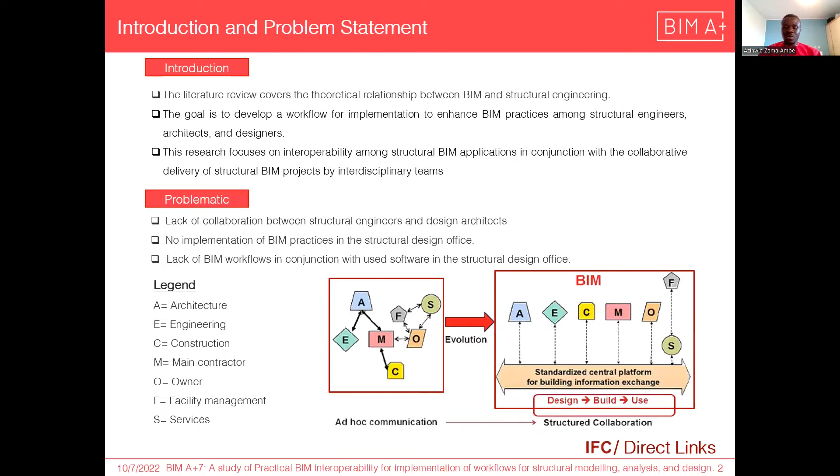This diagram represents the current state of the construction IT industry, how communication used to be made between the different interdisciplinary teams some years ago. We see an ad hoc communication that doesn't flow between each team. With evolution, we have come to realize that with the help of BIM, we have a standardized central platform for building information exchange, which ameliorates communication and cooperation between design teams. So how is this done? This can be done through the help of IFC and also direct links that will be seen subsequently.

The methodology of collaboration that we'll be implementing here will be discussed from this workflow. We can observe the architectural collaboration workflow from a BIM authoring tool, sharing information between an architectural model and a structural analysis tool. At the beginning, we see the workflow of an architect when a project is initiated, how the architect initiates the project within its own team, and how information is exchanged with other teams. We see the workflow of the structural engineering team, how collaborative they are within themselves, and how information is exchanged between them.

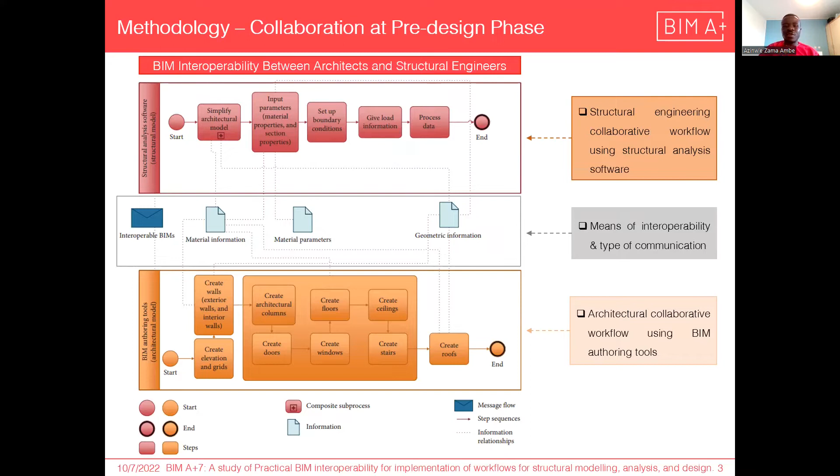There's also a method of communication that permits them to exchange information between themselves. Information has been exchanged through message flows. We have sequences, information relationships. We have material information exchanged at each step based on the type of project and the goals to achieve on milestones. We have material parameters. We have geometrical information as well, exchanged at the early stage of the design.

Our main focus of this work is characterized in this little diagram. What I'm trying to establish here is to migrate from a BIM authoring software used by an architect, say Autodesk Revit, into a finite element analysis software, where we transfer a model with load combinations and load cases into a finite element platform without remodeling, and which can automatically be updated without remodeling.

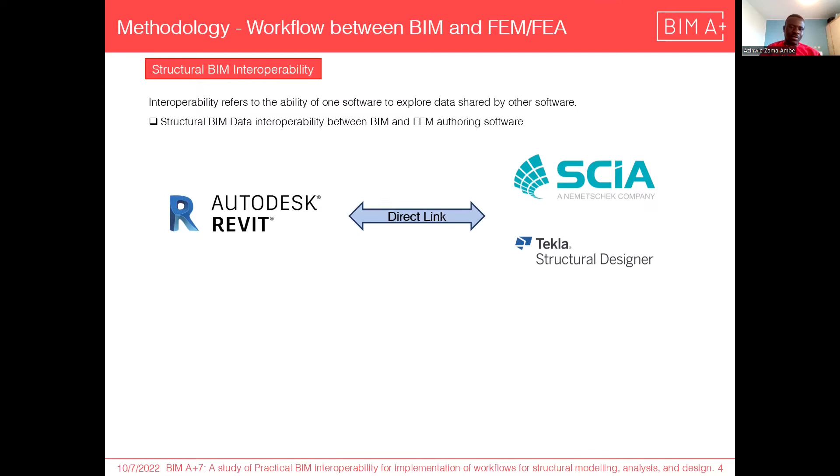So we can see a definition of interoperability. What is interoperability? From the structural analysis point of view, it is the ability to exploit information or data from one platform to another. If we receive information or a model from an architect, like this 3D model, how can we work in collaboration with the architectural team on a complex structure while keeping track of all the updates made on the structure or in the design phases?

We have different types of communication, as I mentioned earlier, and we will be elaborating a lot more on the direct links, because IFC has been covered. We have seen presentations with IFC as the type of data exchange. Since we are dealing with finite element method data transfer, we are going to focus more on the direct links that collaborate with this BIM authoring Autodesk software.

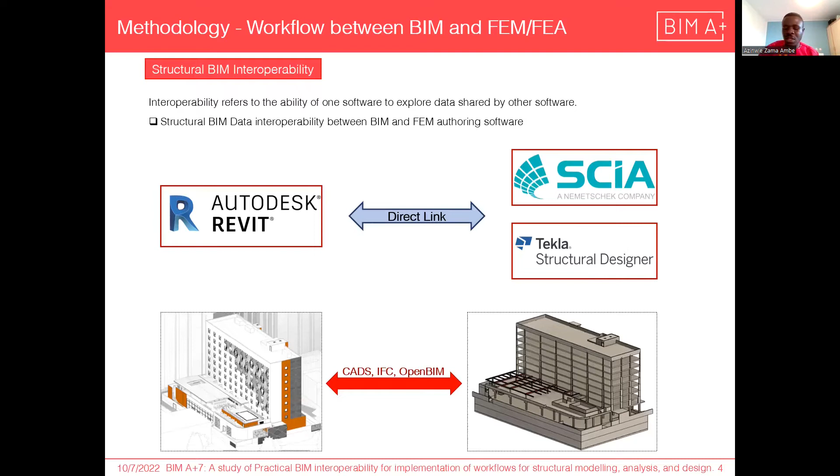So I will go directly into the workflow and the communication, how the workflow between Autodesk Revit and SCIA Engineer works. Why do we choose these? We choose those two basic structural finite element software packages because they are available in the Slovenian and Scandinavian market, and most design offices use them. SCIA Engineer is an excellent software when it comes to engineering report organization, or generating quality engineering reports.

And we will be using Tekla Structural Designer, which is an advanced BIM structural design software as well that is implemented when it comes to steel structures.

And so when we have to implement the workflow between Revit and SCIA Engineer, we begin by creating a structural model in Revit, meaning we can collaborate, we can work together with the architectural model, we can define our grids, basic grids and basic structural elements like the columns, and we take it from there.

We start by creating the structural model in Revit, we create the analytical model in Revit, and we export it to SCIA Engineer using the SCIA Engineer direct link, the CADS link rather. We do the analysis in SCIA Engineer, we do the designing in SCIA Engineer, and we export back to Revit for possible update in case the sizing of the structural elements have changed.

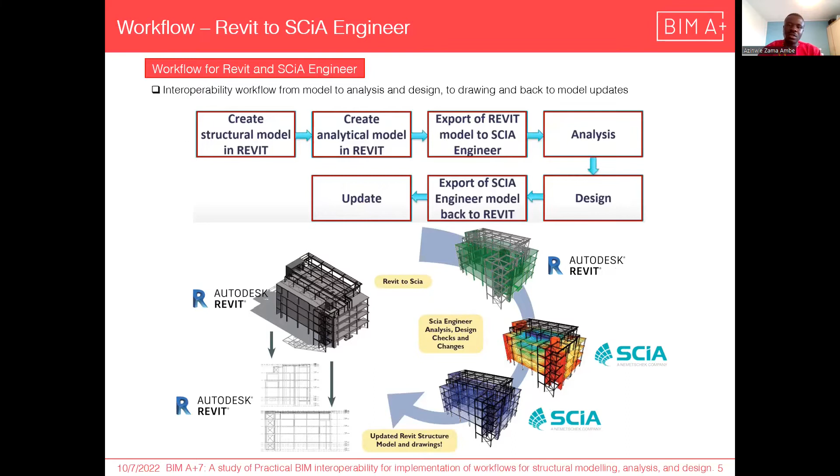And this is actually an application of the workflow between Revit and SCIA Engineer. We have this hall that was modeled in Revit structure, and we have to convert this structural model into an analytical model so it could have all the properties of the load cases and the load combinations. And this is being done with the help of this CADS link.

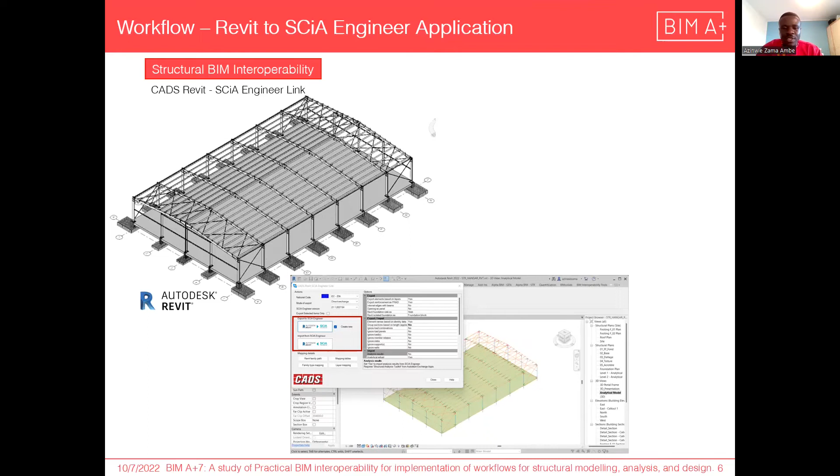The CADS link is a bi-directional link, meaning it works in both directions. We can do an update in Revit and get the same update in SCIA Engineer, as well as change something in SCIA Engineer and get the update back into Revit. This is the result of what we have in the SCIA Engineer workspace after doing the direct mapping into this workspace.

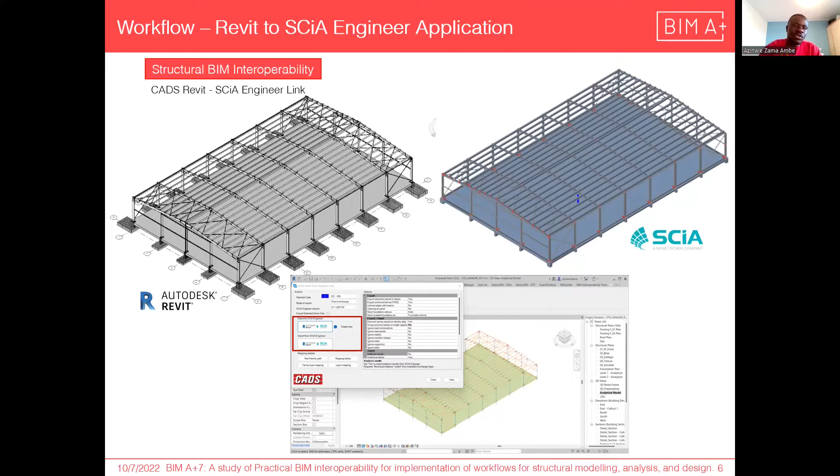Actually, there will probably be problems, and those are the problems we are trying to solve within this workflow. When we do a mapping into this structural engineering software, we'll have some challenges with the mapping of the materials. If you see my screen, we have a few materials that were not properly mapped into the SCIA Engineer workspace. We have 22 elements that were not properly mapped; these 22 elements are the footings that were designed in Revit structure, which were not recognized by this finite element structural tool.

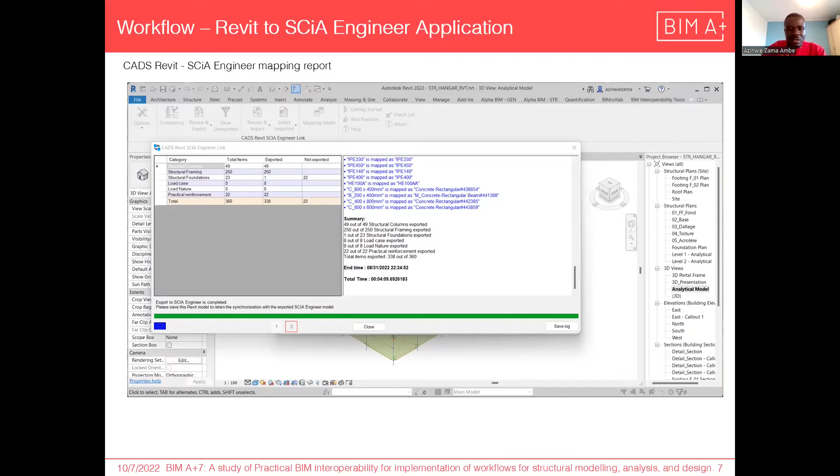So what do we do when we have a complex structure? We have to make sure that the structural elements we are mapping into these softwares are actually identified as structural elements. They can be read and understood by this finite element tool. And so the classification of each element while modeling is very important. We also have to define the design codes and appropriate materials used on them.

So without wasting time, we'll also look at the workflow between SCiA Engineer and Tekla Structures, meaning after doing the structural analysis of a structure, we can share our data back to the architect through the direct link that maps the information back into Revit, or we can share our information into Tekla Structures for designers to do the steel detailing for shop drawings and other related disciplines.

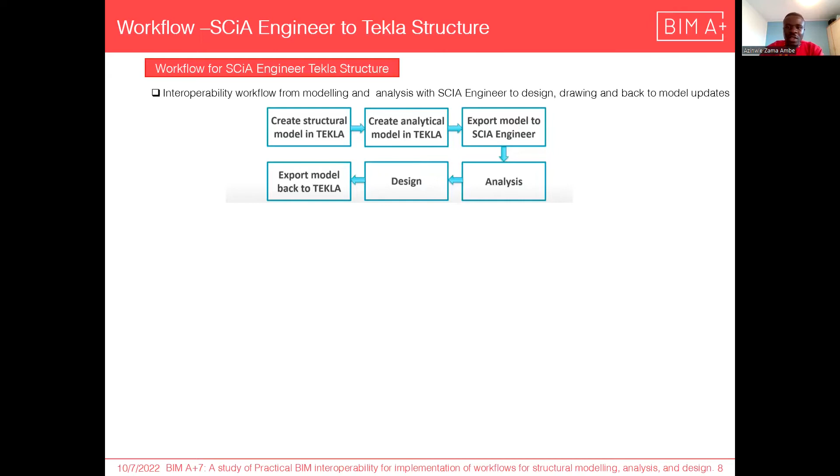So the interoperability workflow from modeling and analyzing in the SCiA platform into the Tekla structural platform is done like this. We start by creating our model, like this simple model that we modeled in SCiA Engineer. We do the load cases, we do all the designing, we size all the structural elements, and we use the SCiA Engineer direct link to map this structure back into Tekla Structures, and this is the result we have. Here you will see that we have a perfectly mapped model in Tekla Structures without any loss of information.

This is because the design codes were well defined. The structural elements were well mapped, and we didn't experience any loss of information in this case. In the same way, we did the same back into Revit, and we didn't have any loss of information, meaning this workflow actually works perfectly.

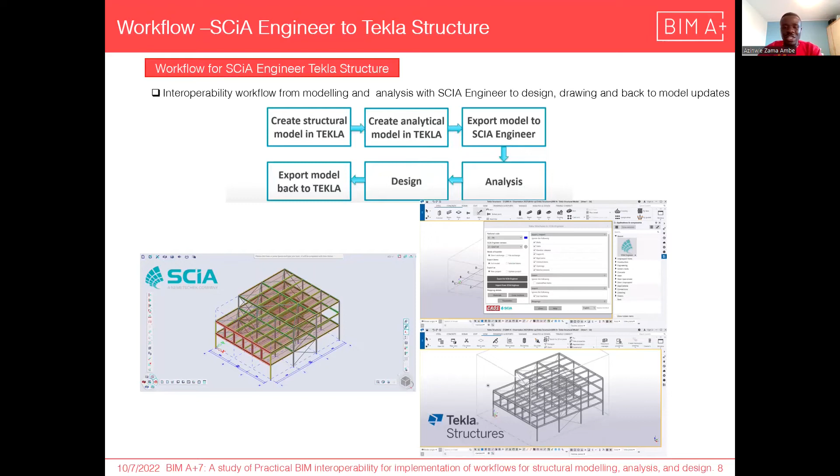And so the main objective of this work is to define a workflow that can be implemented in a design office. Many design offices face a lot of challenges in implementing BIM because, first, they don't have trained people in their team that could implement BIM workflows. There is no defined workflow between the architect and the designers and engineers, as I mentioned earlier. And so this is something we proposed and tested with the available software that some of these design offices use here in Slovenia.

So we actually begin with this. This is, let me call it, the milestone of this workflow, meaning we are trying to implement a workflow using Trimble Tekla softwares, meaning we start the design from Tekla Structural Designer. We collect all the information from the architect, from Autodesk Revit, maybe using the DXF, DGN, DWG or IFC file, and we map it, or we export it into Tekla Structural Designer to define the grid lines for the preliminaries.

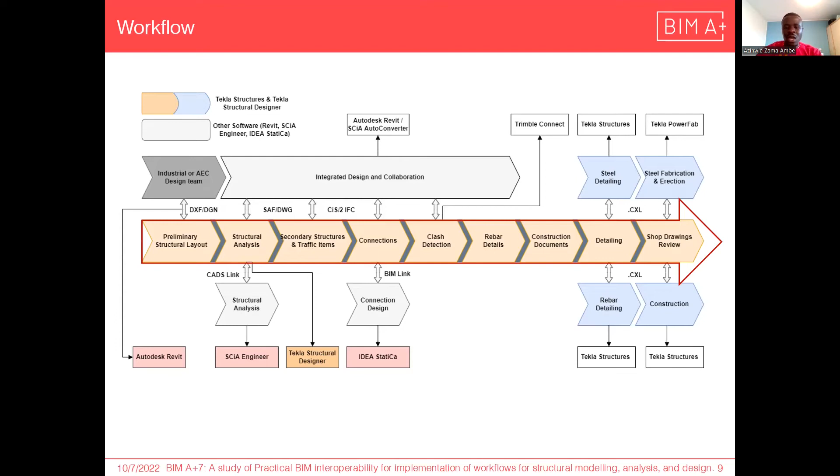And so we have a case study here. It's actually a simple case study of a hall that was designed using the European norms, the Eurocode, with French national annexes. Why do we use the French national annex? We use the French national annex because this project is actually a real project and had some properties that were given to implement for the project.

It is actually a warehouse that has a height up to the roof level of 5.626 meters. In the X direction, we have four bays of 5 meters, four spacings of the structural grid at 5 meters, and in the Y direction we have a total width of 10 meters. The self-weight of the frame is automatically applied, and the dead load is considered to be 0.6 kilonewton per meter square. We had the roof imposed load as the snow load at 1 kilonewton, and the wind load was automatically generated by the wind wizard in Tekla Structural Designer, as we see below.

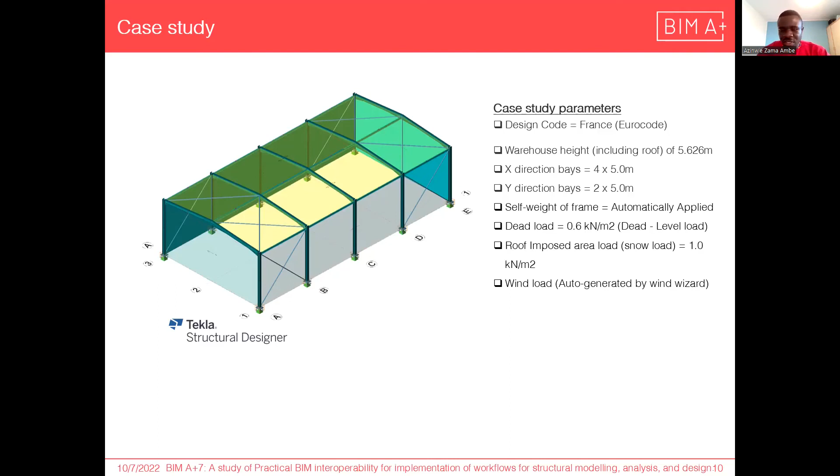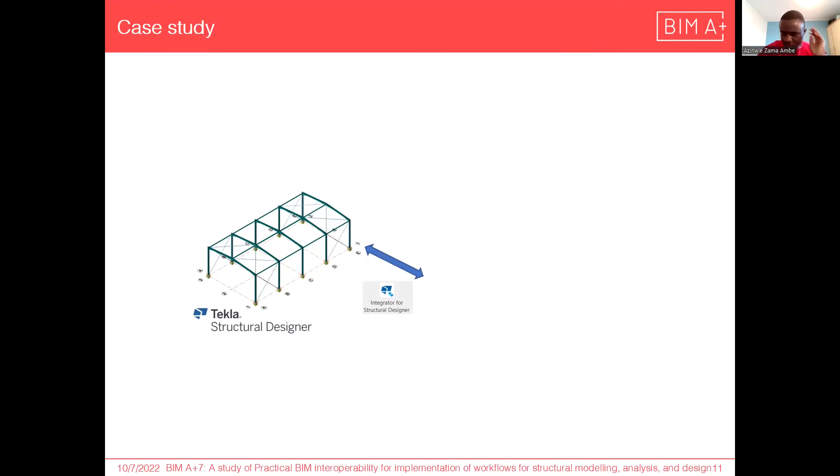And so after sizing and designing this structure using Tekla Structural Designer, we took into consideration the embodied carbon design of the structure, for which Tekla Structural Designer is an excellent software that gives a good result, to keep the structure green, eliminating the carbon content from the structural documentation up to the execution phase. So we have to share the model with the architect using the integrator for Tekla Structural Designer. And this is what we had after exporting into Revit.

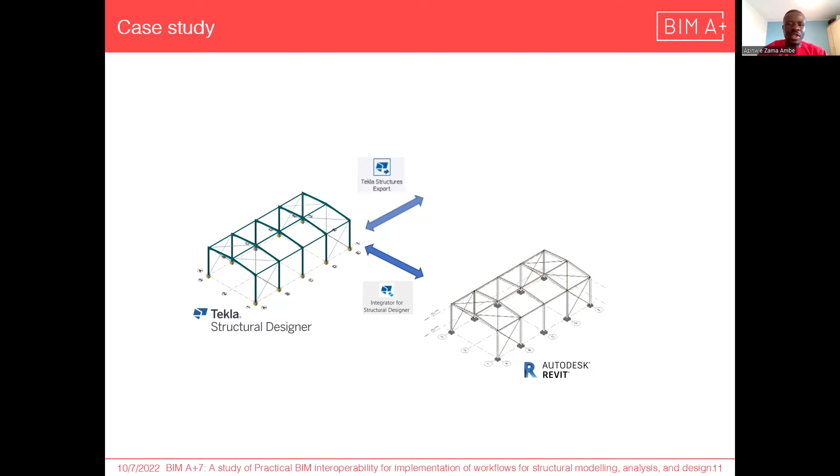You see, we have the basic structural elements that were sized and mapped back into Revit. We have also the Tekla Structures export with these elements in Tekla. We observed that we had some missing elements while exporting to Tekla Structures, because the bracing elements were absent, the purlins were absent, but the columns and the rafters were present, which are the principal structural elements that we really need. The grid lines were maintained at their initial positions, and these are the basic information that we need to kick off with the project.

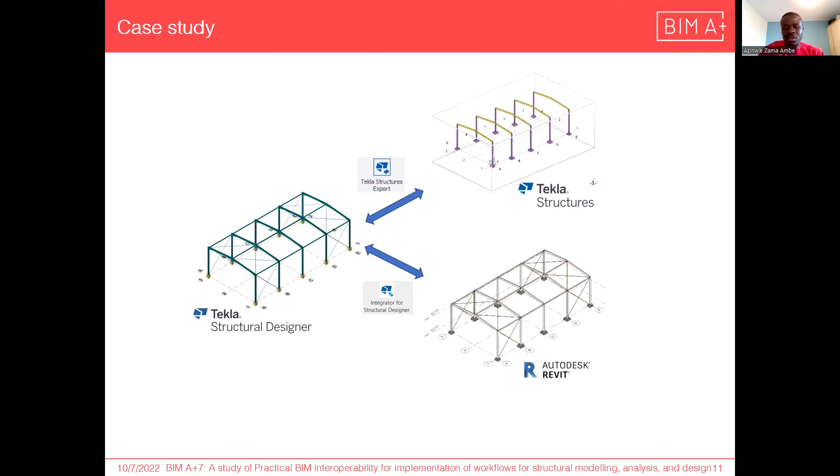And after choosing the appropriate software to do the shop drawings and generate the appropriate general arrangement drawings, we came out with this. We maintained the positions of the main structural elements, the columns, the rafters. We incorporated the purlins, the bracing elements, as you can see, and we did the connections. We calculated all the connections using IDEA StatiCa and auto-mapped them into the Tekla model, which is auto-adjustable.

I'm sorry to interrupt you. You are presenting a very detailed work. I just ask you to be more synthetic because you have exceeded the time for presenting. Okay. So yeah, thank you. Okay, I just have one slide to complete. Okay, thank you.

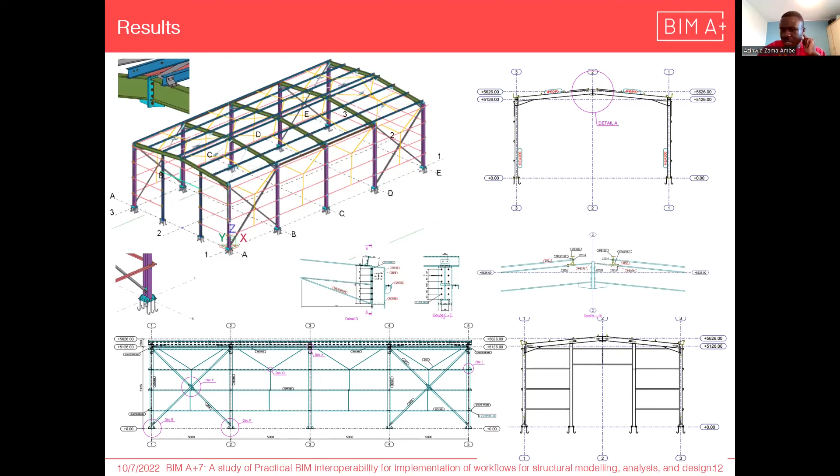And this is what we have after doing the design of all the structural elements, sizing, mapping, generating all the construction drawings, and doing the preparation for fabrication, and we came out with an extract of this as a presentation. We had the elements that were automated and updated into the Revit model and shared with the architect to modify the architectural plans. And actually, this is the end of my presentation.